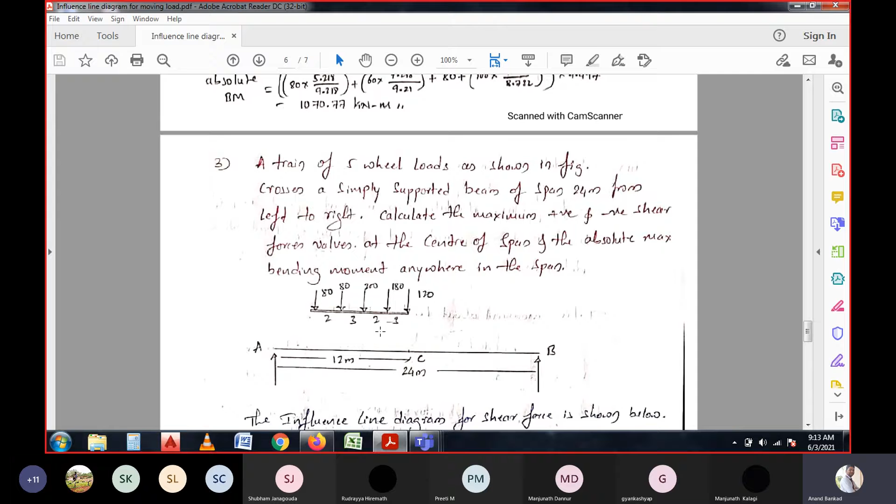This is a question paper question. This question has arisen in the question paper, VTU question paper, final year, with 20 marks. So if your module comprises 16 marks, then it will be asked for 16 marks, because it carries heavy weightage of marks in either section of each module. For example, it is in question module number 2. In module number 2, you'll get 2 questions including OR. In the OR question, you'll get only one question with this concept. We need to solve one question. It is more than enough to get the particular marks allotted for that.

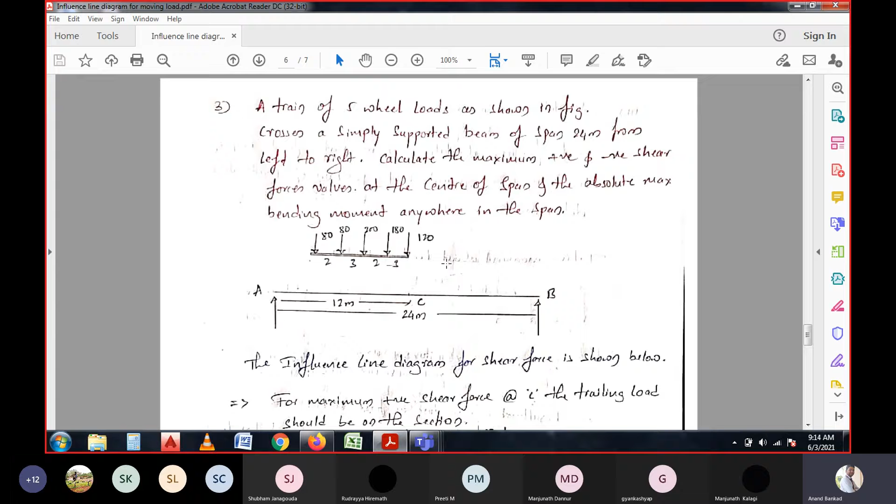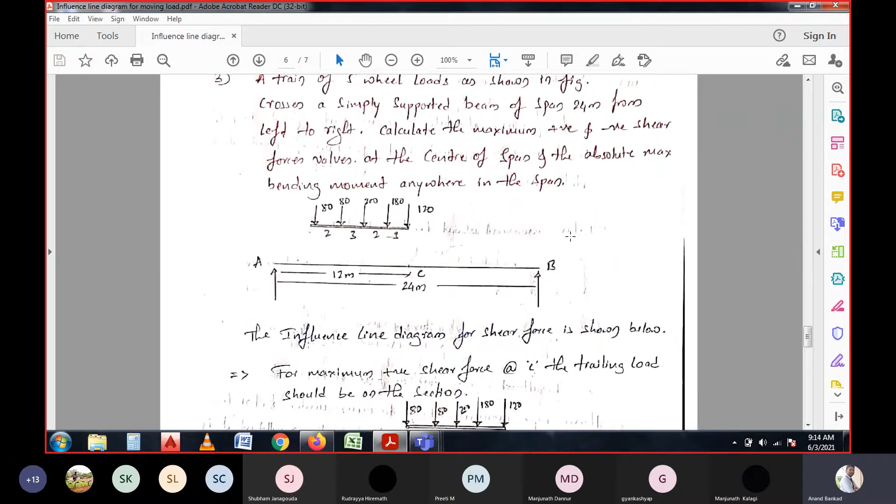This is the question I would like to discuss. When they ask to calculate the shear force and bending moment, it is all about knowing the influence line diagrams for those concepts - shear force and bending moment.

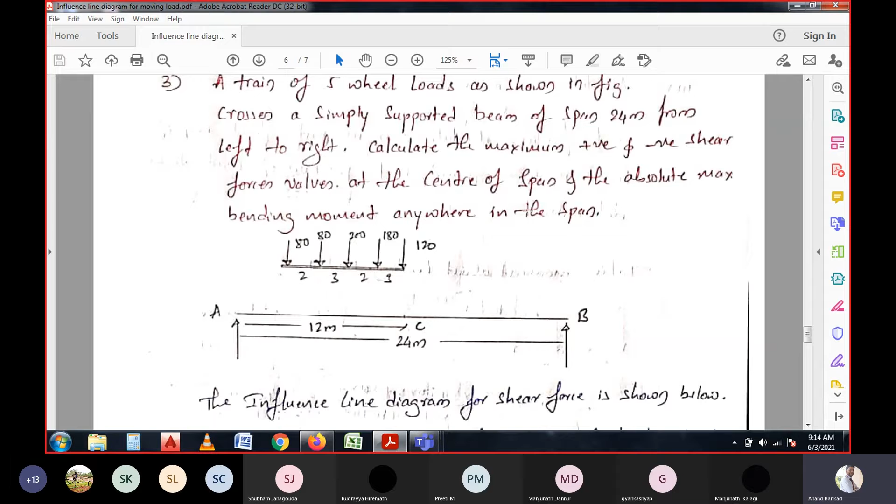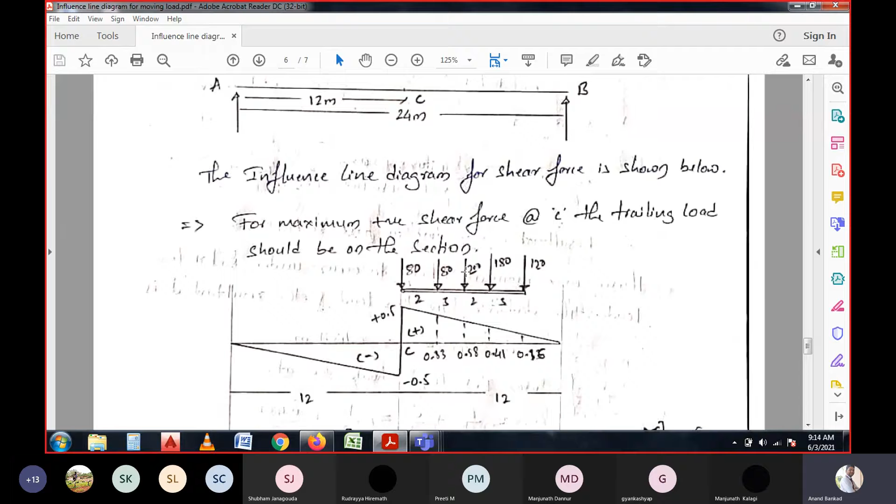So here I considered the shear force diagram. First thing, they say to calculate shear force, which is positive, which is negative. Apart from that, for positive and negative shear force, we need to have the load combination on the right side of the span and the left side of the span. Keeping that in mind, we look forward for calculating the shear forces.

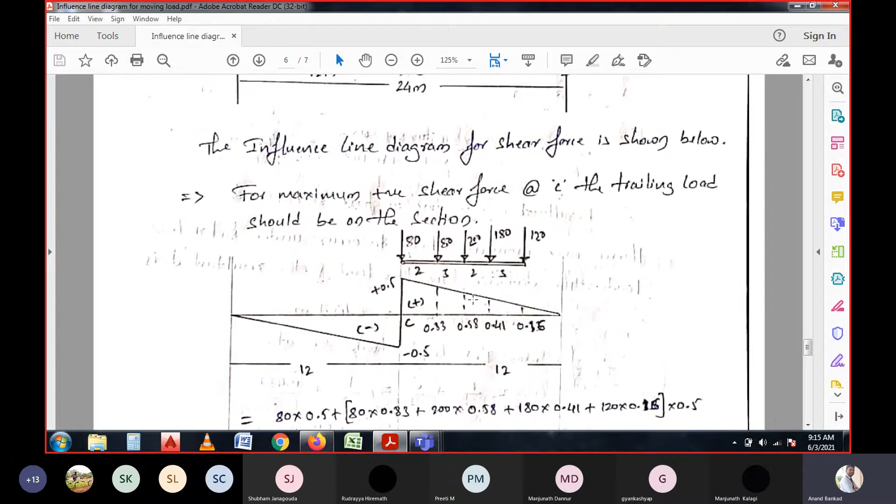So it is written here, the influence line diagram for shear force is shown here with the diagram, which is considered for positive shear force, because the loads which are considered on the right side of the span or right side of the section, that is leading to give the positive values.

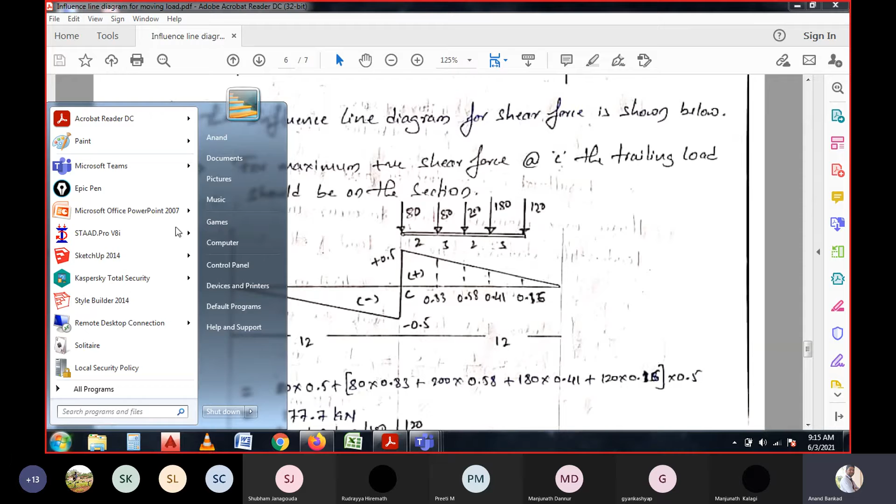So now it is again a second thing - it is again a concept of taking the coefficient values for each section of the loads, where they are exactly lying. At this point, total will be having 24, right? 24 is the total length of the beam. So on that 24, there is a section we need to consider for 12 meter.

I will try to show this concept. This is a total span of 24 meter. In the total span of 24 meter, here I would like to consider the sections for each of the loads. So how do you consider? These points need to be known. So how do you get these points? And these points are considered for the whole span, right? These points are considered for the whole span. That means we need to have 12 meter for the span of 24.

So 12 by 24, that will be 0.5. On either side we have a 12 meter span, then 0.5 and 0.5 will be there. And the 0.5 - because if you consider the right span, always when the right span is considered, that is written at the top, and when the left span is considered, the values will be written at the bottom as negative shear forces, negative coefficient values. On either side it is 12, so no need to calculate it again. The 0.5 will be the value. So 12 is the span for 24, that is written here.

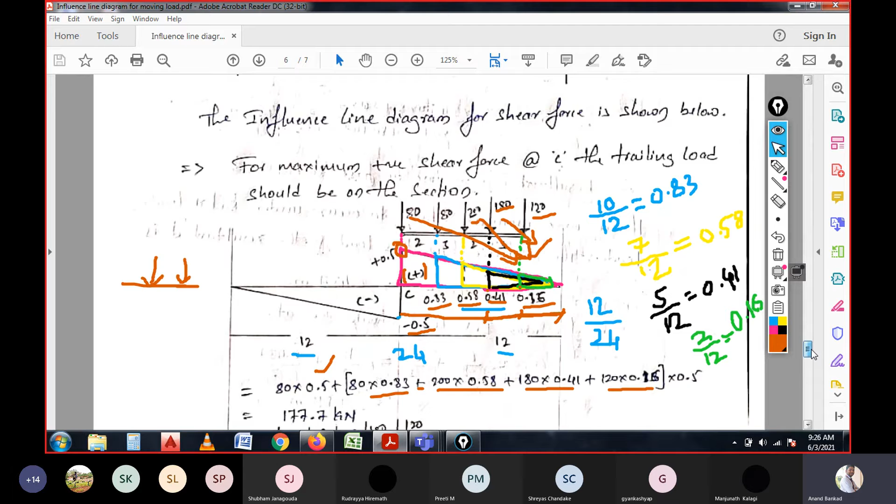So this is all about the coefficient for the shear force, the positive movement, positive value, which is obtained as 177.7 kilonewtons.

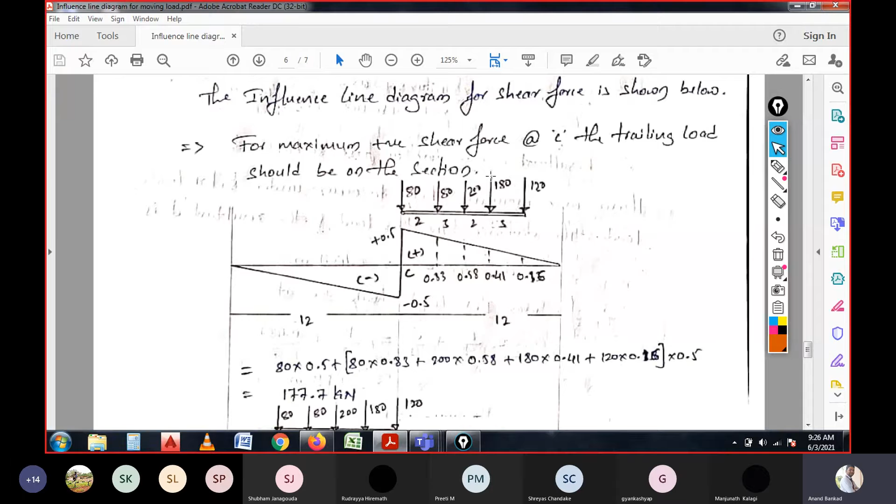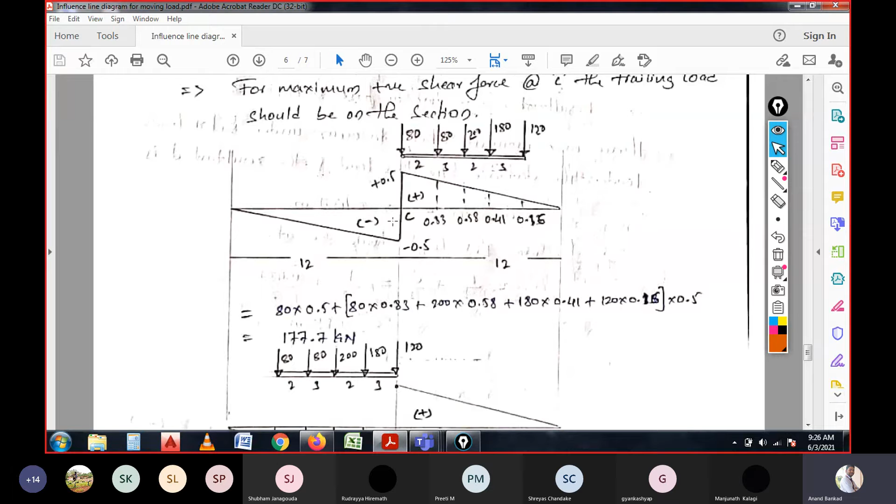At the same time, if you want to calculate the negative shear force, these loads are placed on the left side of the section as shown in the figure, with a 120 kilonewton leading load on top of the section. So again we need to consider this.

For a span of 12 meters, we have a 0.5 coefficient value, and again at each section we need to consider the coefficient values like this. This triangle is made, and that's why I'm showing the color distances - meaning the distance measured from the point to the support, or point to the end of the section. Apart from this, we have another section of load, which is considered in this manner.

Apart from this, next we have another load which is moving, like this. And then we have another load like this. So in the total span of 12 meters, up to 10 meters, it remains with 2 meters here, and at this position it is 2 meters as already written, for this span it is 3 meters, and for this span it is 2 meters, and for this span it is 3 meters.

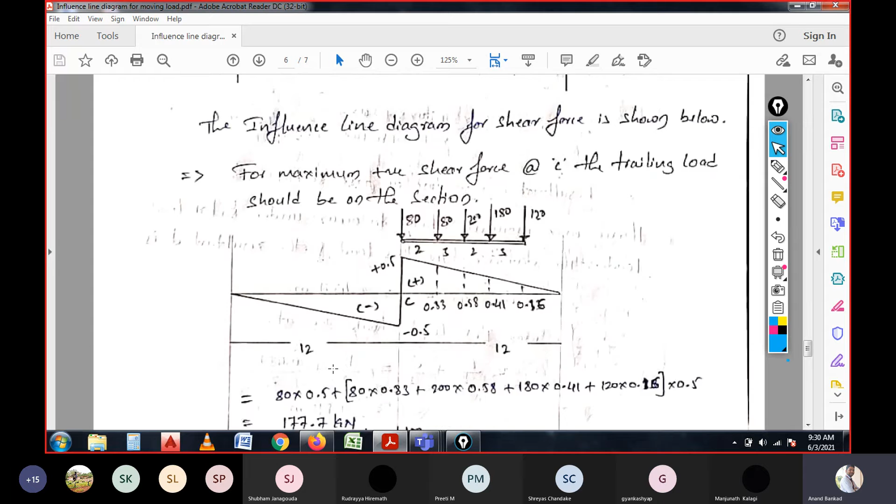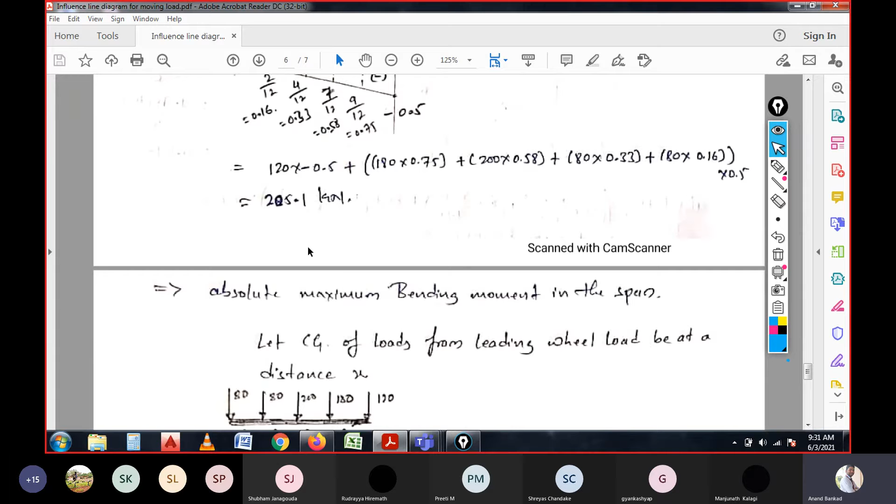So if you observe these two values, what they asked in the question is to calculate the maximum positive and negative shear force. After this we can conclude that the maximum positive and negative shear force values are 177 and 205.1 kilonewtons respectively, which has to be written at the end of the shear force calculation.

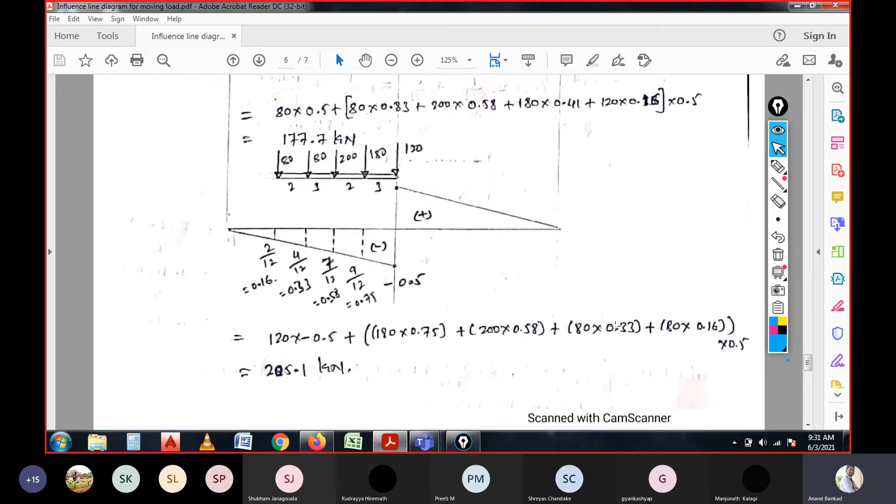And it's the same thing we discussed for the previous problems, only this time we have calculated it for a specific section. I hope it is clear for you.

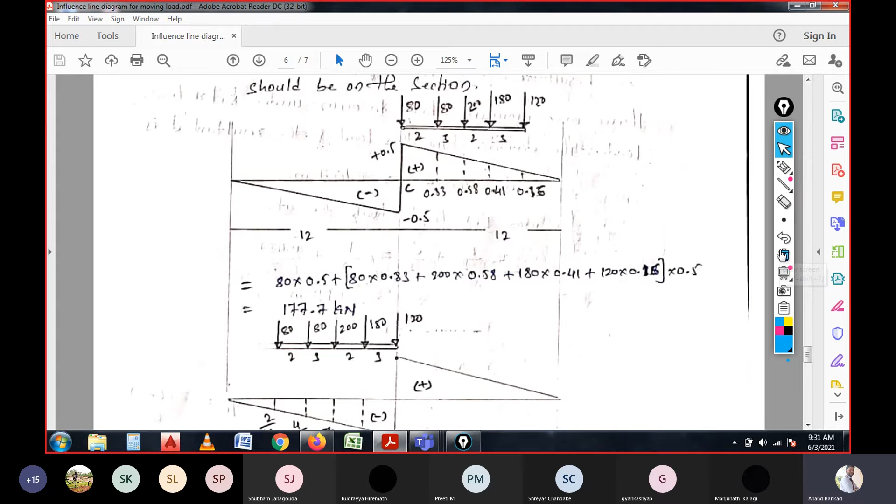Let us move to the design, that is bending moment values, so absolute bending moment in the span.

Again, it is similar that we need to have a CG, that is center of gravity of the load, because the load is moving with different intensities and different center to center distances. In that case, we need to have the CG from the end, and later we need particular distance values.

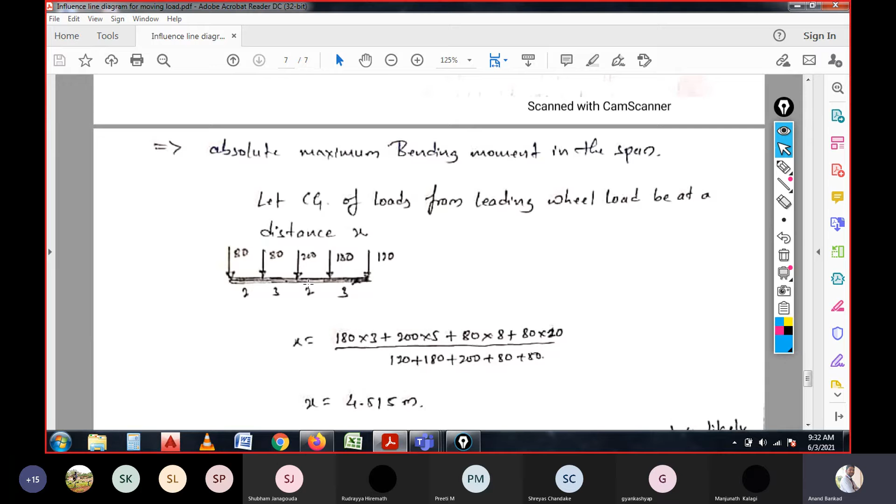Which is eccentric from the actual load. So what we have done in the previous column is taking the moment about the leading load. The same thing is considered: 180 into 3, 200 into 2 plus 3 is 5, 80 into 5 plus 3 is 8, and last 80 into 10, and dividing with all loads, 180 plus 200 plus 80 plus 80, which is the sum of all loads.

So once you do that, the 4.515 meter is the total CG of the load, which is considered from here. So 4.515 which is lying at here, that we could consider as crossing the center distance.

Then it is nearer to the load of 200 kilonewton, which is the maximum load, since this distance, if you consider that is near to 200 kilonewton, hence the maximum moment is likely to occur with this load.

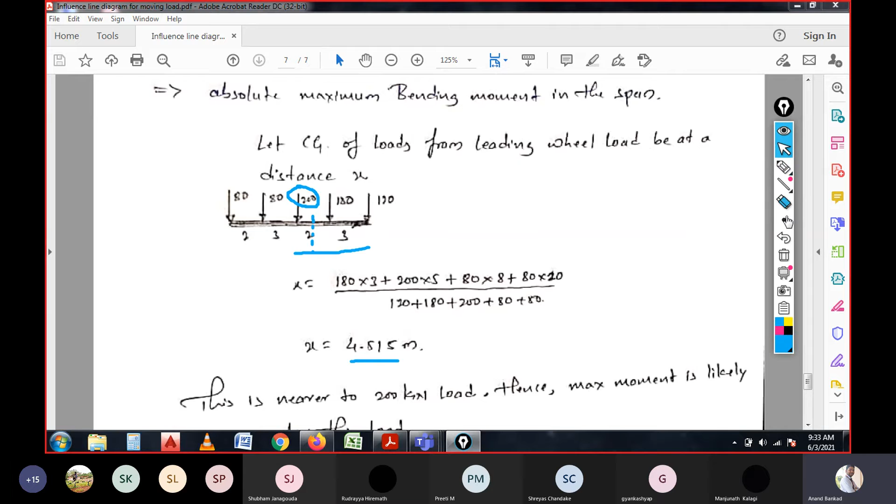So if the load is having the distance from support to here, it is about this one, so it is 4.515. This is the total distance from the support, and if you consider the total distance to the load, it is 5 meter.

So in this 5 meter, how much is it having an eccentricity to the load? Since we are getting the distance of CG at this point, how much is the distance of load having the eccentricity of the total load? That is what we have calculated. So in the total 5 meter distance, we have reached up to 4.515, and the remaining distance is this one.

So this distance is calculated as 0.485. This distance is the eccentric value for this 200.

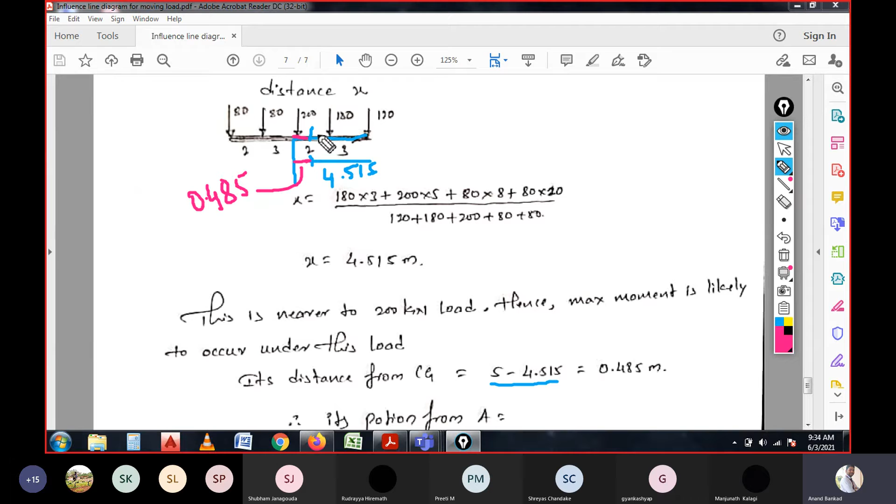Because if you consider why it is not considered for 180, it is because if you consider 4.515, and for 180 it is nearer to, so 4.515 minus 3, how much will we be getting? It will be 1.515, right?

So if you consider these two values, 1.515 will be the larger value compared to this value. So on this basis it is considered which is nearer to 200 kilonewton.

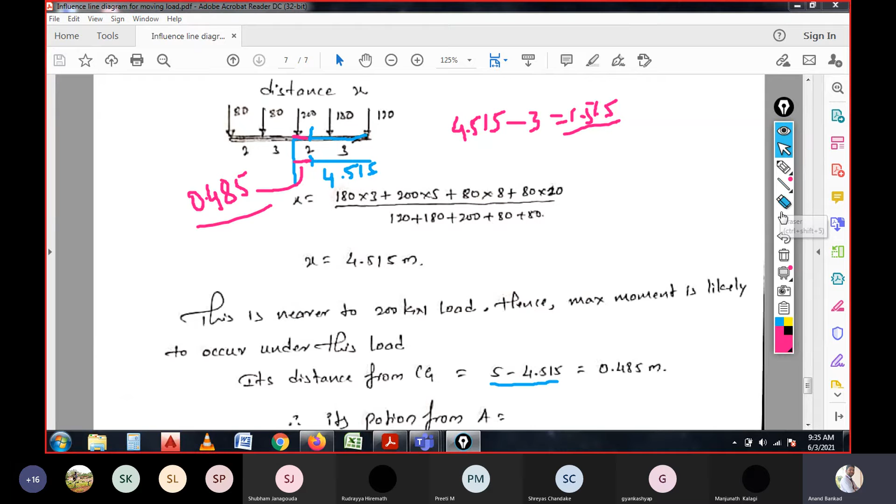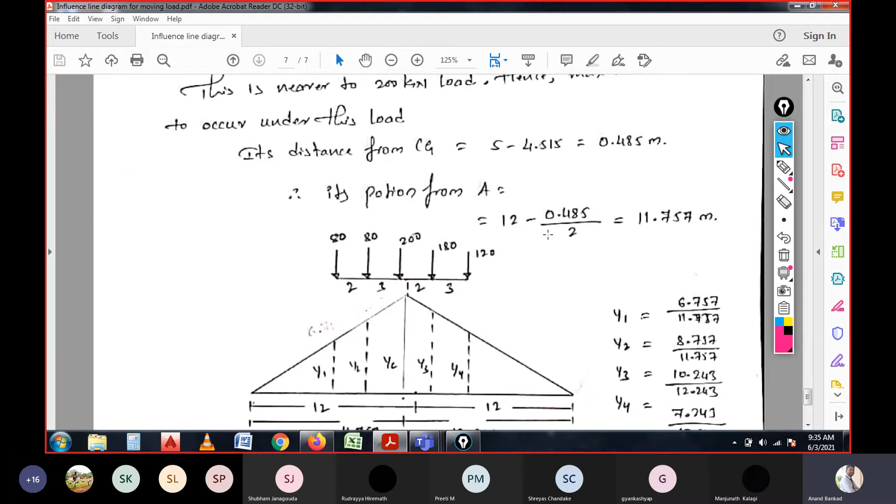And the eccentric distance of 0.485, which is from the 200 kilonewton load, has to be considered in the calculation. Again it is shown in the question: 0.485 is the total distance and distance of the CG, and its position is already considered from the support A.

Same thing what we have considered in the previous problem. So total span is 12 meter. From the end we are considering, or else in the previous problem what we have written, L by 2, which is nothing but 12 again, L by 2 minus the distance by 2.

Distance by 2 is why we are considering, because the distance considered up to here is 0.485, and again that distance needs to be divided equally on either span, on the right hand span and on the left hand span.

So for equal distribution we have to consider it as a half, and that half needs to coincide with the total length. So that is considered, and that has to be considered on the right side, and remaining will be on the left side. Let me write it over here like this.

So how this would be, here it is a total of 4.515, plus half of this one, 0.485, that is plus 0.242.

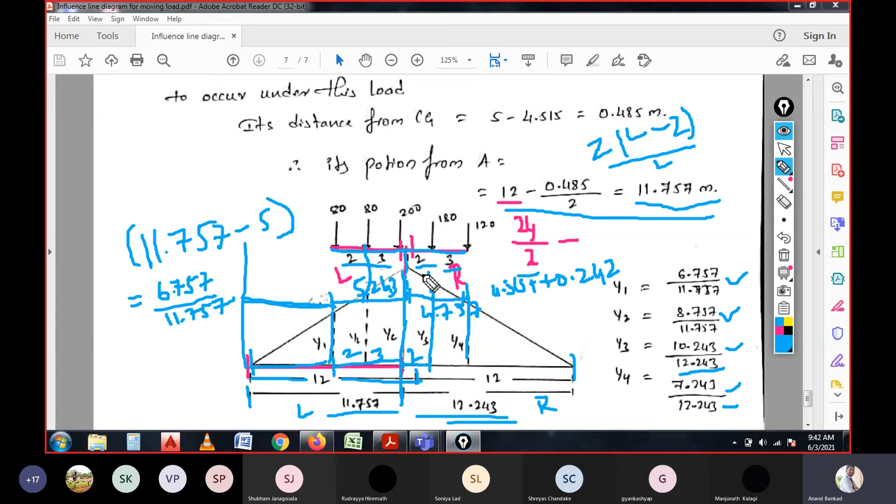So here, YC we have calculated as 5.99, which is nearer to 6.

So the absolute maximum bending moment needs to be multiplied with the notations, that is intensity of load, into the coefficient value for y1. y1 is 6.757 divided by 11.757. That is written plus 80 into the coefficient value of this load.

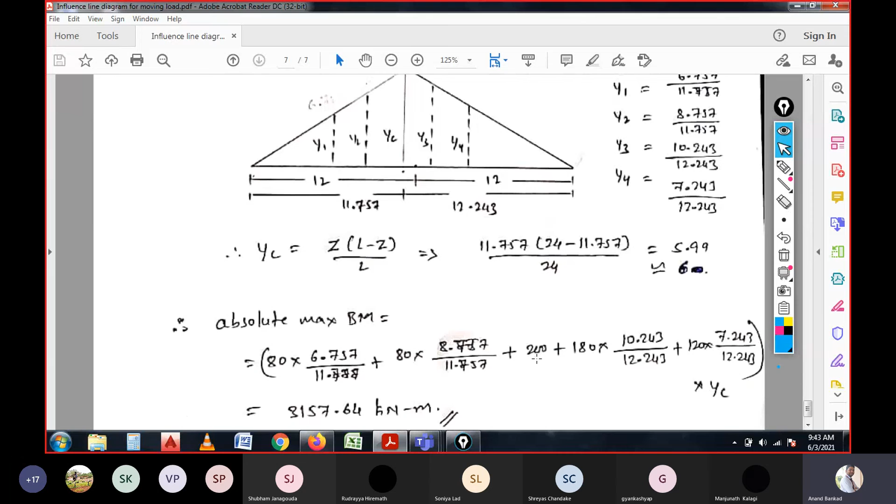And 200 into, since it's a unit load because 12.243 divided by 12.243, which is unit, in this case we have not multiplied. At the end the YC has to be multiplied for all loads, for all loads at the end.

So once you do that, you will end up with the total maximum absolute bending moment. This is what they have asked in the question, to calculate the bending moment for the given train of loads.

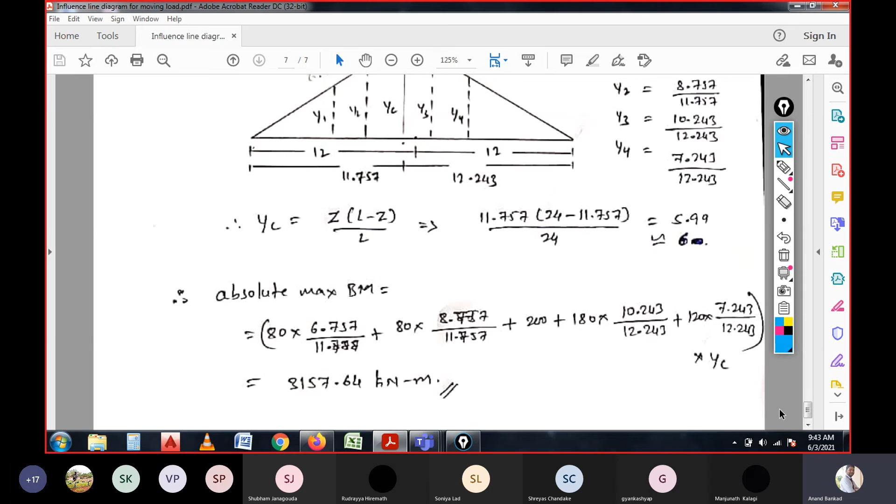Right, this is this much. If you write it, you'll be able to get half of it, and that is the total marks allotted.

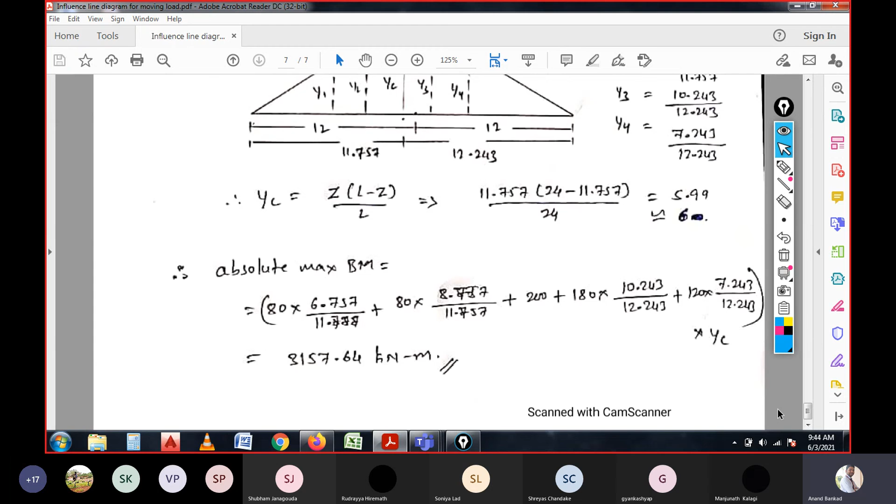Okay, this is all about the problem we have considered in this class. Regarding this problem, if you have any doubts, please let me know. Apart from that, in the previous class we have already given one assignment question on this, on the previous problem. I hope how many of you have solved it?

So how many of you have solved it? Yes, Abhishek. Sir, that shear force calculation, 0.5L.